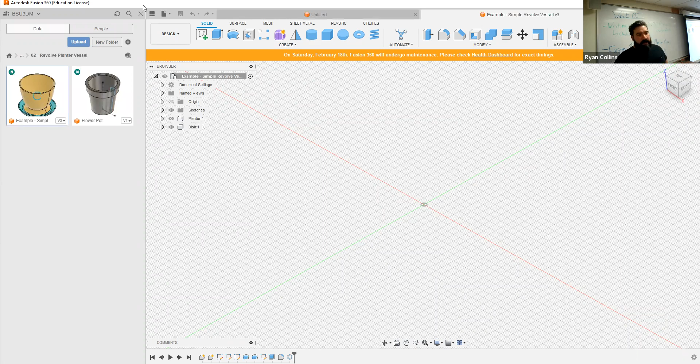Right now it's in the default appearance mode. Default appearance is this shiny metal, steel, that's what it generally looks like. If you're on Windows, press and hold Shift and press N.

It switches colors. If you're on Mac, I think it's Command N. What this is showing you, if you look on your browser tree, I've already created two components, one for the planter, one for the dish, and those are just automatically assigning different colors so you can visually tell them apart. That's all. It has no bearing on the actual finished model, on exporting it into a 3D printer, or on the filament choice.

This is merely a visual representation. As I orbit around this, you can see—let me hide the dish—that in this case it is a cup, basically with a foot, and I've used the circular pattern tool to create holes in the bottom. I chose 5 because odd numbers are always satisfying to me for whatever reason.

Stepping back on the history slider here, let me snap back. First, I started with creating sketches.

I started with creating the components themselves. Up above the assemble dropdown is the new component dropdown. Mouse over that, and it will show you it creates a new component. Remember that the default at the browser tree here is a single cube, but once you start adding more components—which is still a single cube—if there are multiple components within that component, in this case the main browser tree, the icon changes to this little stack of components, which is the icon up here over the symbol.

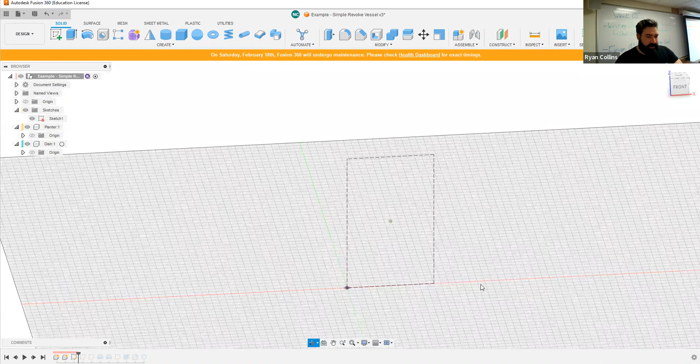So like I said, I was working on the XZ axis—X red, left right, Z blue, straight up and down. What I did for this, I'll open up the sketch. I just established half of my sketch, and I'll show you why I did this. I made this 100 millimeters tall and 60 millimeters wide because the overall is 100 by 120. I only need half of a sketch.

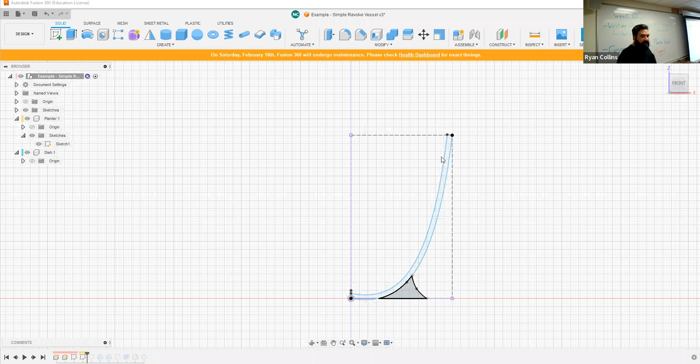Finish sketch, go to the next. From there, since that one sketch is outside of my components, I started the next one within the first component, the planter. Open up, unhide, and I made half of a profile. This is just a sketch—you can see closed sketch because it's highlighted blue. It gets a little bit filled out, but that's okay. They're very basic; we can add more to this in a minute, which we will. I took that closed sketch and finished it up.

In this case, because I was just streamlining this, I went ahead and made my half a sketch for what will be my dish. But I made these within these separate components, or rather within their respective components.

To do that, you have to make sure by default, the full project is active. When I mouse over the very top, on the right hand of this bar, this little dot with the circle, the dot inside, that shows active. That right now means the entire project is active.

If I want to work just within one component or the other, as I mouse over the component icon, that little circle appears. I click there. Now only that is active. However, the other component is visible because it's still visible. Remember, Fusion will act on anything that is visible. If I don't want it to act on at all, hide it.

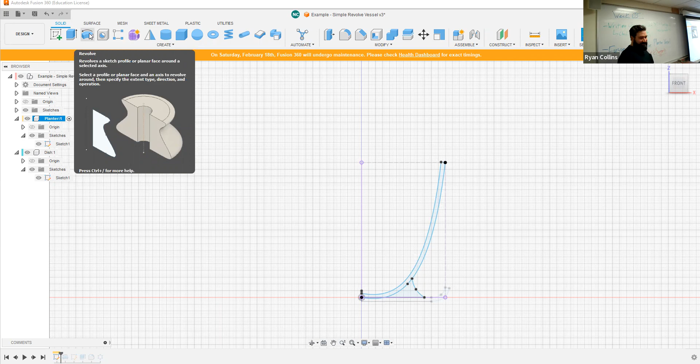But from there, I took that sketch using the Revolve tool, mousing over. It takes a sketch and revolves it around an axis. That doesn't mean it has to be on that axis, but revolves around it. Take that, bam, instant form.

It took that half a sketch, rotated around 360. You don't have to revolve at 360. You can play with this.

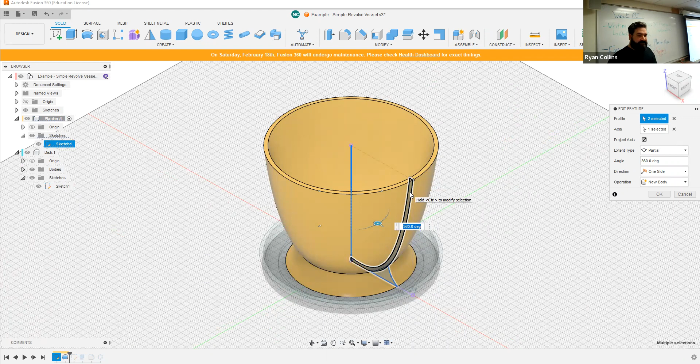I bring up the toolbox here. You have your profile, which I selected, and I made this in two sections, just the cup itself, and then I added a foot. Those are the same sketch. You select an axis. In this case, it's the actual origin Z-axis. And then you can play around with this stuff.

You want it to be partial, maybe do 180, half a cup. You can have half a cup of tea, you Mad Hatter. Sorry, I can't. It's always stuck in my head. You were right not to laugh at that. You should not laugh. That wasn't even a good reference.

But you can play around with these settings. Your standard is full. It's going to go 360. If you want less, you can switch it to partial. Or if you're creating against something, you could create it to objects. You always also have your actual slider. You could do this by hand.

So you can just make partials. But in this case, we're going to do a complete. So go to full. New body, that's all fine. Okay, there we go. Next thing I did is, because I already had the sketch for the dish, I did the same thing for the dish.

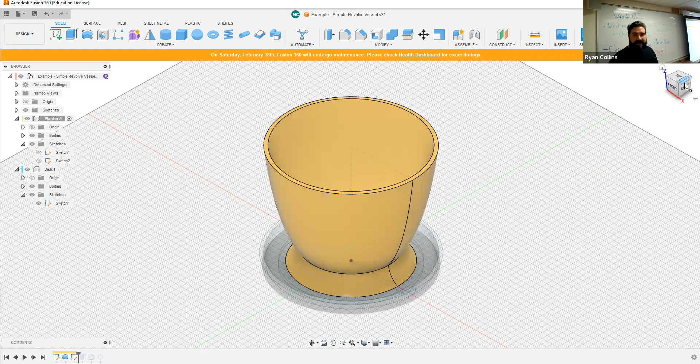Actually, in this case, the next thing I did wasn't make the dish, but make the holes. What I did is I made a new sketch. If I zoom down here, made a new sketch. Actually, I did this on the bottom.

Now, you can take two paths here. You can make your sketch, use the circular pattern tool, which is under create, pattern, circular pattern. You can either make your sketch, finish the sketch, make multiples of that and then extrude through, or like I did, make the one sketch, use the extrude tool to cut through.

Then I added some fillets. Remember, it's fillet, not filet. Filet is a fish. Fillet is an architectural term.

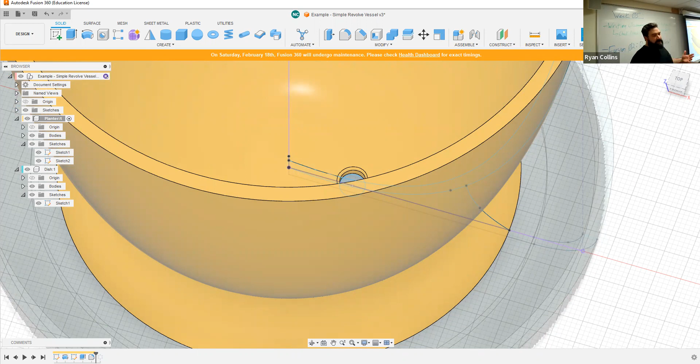Made roundovers. Then I used the pattern tool to create multiples of the completed feature, so I didn't have to go back and do it for each one or anything like that. Now, you don't have to make each one for each one. You can select all of them and then add the fillet tool, stuff like that. So it's not like you need a multitude of fillet tools, but there we go.

That's pretty much it. From there, then I went ahead and did the same for the overall sketch. Now, right now, it's not showing any other stuff. I know I did the dish. It's literally right there because I only have the planter currently active, so it is only showing actions for that component.

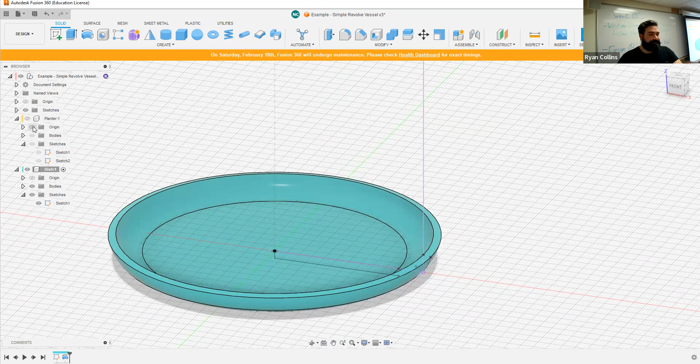If I either activate the whole project, now all of my tools come back and all that such. Or I could just go just to the dish and you can see it isolate just the parts for that. Let me hide the planter. For the dish, it's simply taking that, making that sketch profile and using the Revolve tool to make it a 360 object. So that's essentially the project.

Obviously, we're going to go into some more details on how to make more features for this, because if nothing else, put this in a tray, and right now, yeah, it has drainage holes.

That can't go anywhere, it's just going to bubble underneath there. So I'm going to show you how to make paths through there so the water would actually drain out and away from the dish instead of just getting trapped on it.

So those are the only requirements. You can see why I made that bounding box there. It gives me personally a frame of reference. You don't have to make that, I just like doing that. That's how I prefer to work.

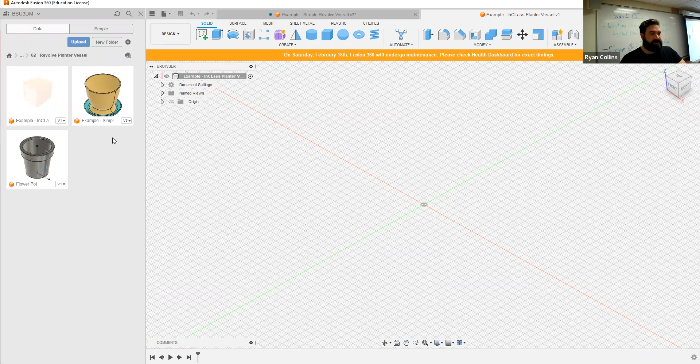Okay, so like I said, first things first, I like to start with either adding my components or with the bounding box sketch. So since one of the main things for the project is multiple components, let's do that.

There's nothing wrong with creating everything just as you normally would, but just to get in the habit of starting with stuff like this, I'm going to start with making my components. I go over to the assemble tool, drop down - first thing is new component, or one of the default tools up top. Hit there, and I'll go ahead and label them at the start.

Planter... geez, dumb fingers. Start there. All right.

So let's delete that, I don't need that new component. I can right click on there, delete. There we are. So now I have reactivated the whole project - little mouse over the top bar, select the feature. Now the whole project is active.

Start new component. If you look at the bottom of the toolbox, there's a checkbox: deselect activate, and it won't activate that component immediately. That's all you need to do. So with that, geez, we'll just say tray.

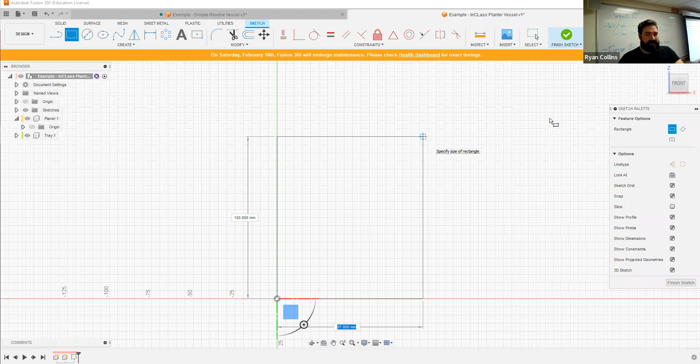I will go to my dimension bar, select there, draw up. All right, that one's only 60. Hit there. Same on this side - oh, that was actually 100. Cool, there we go, so right there.

But as was said before, you want this to be a construction line. So hit escape, double click a side - if you select just once or in the middle, it'll turn that all, but I want just the edge here. Double click on one of the edges - you can either hit X or go over to the construction toolbox here and press construction. Turns into the dotted line.

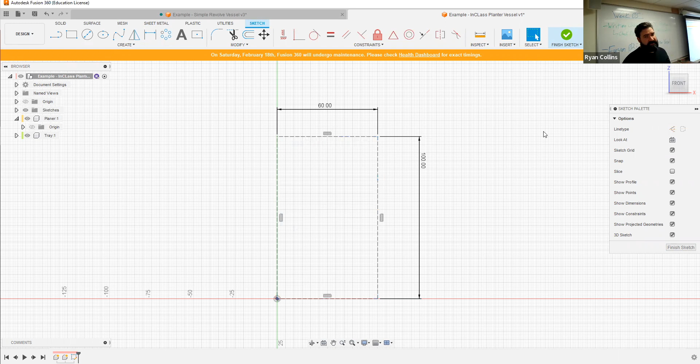Okay, that's it, that's all I need for this first sketch. Now hit finish sketch. This sketch exists outside of my 2 main components - it's on the main browser tree here.

It is outside of either of these. Now I want to start making my vessel and my tray.

To do that, I'm going to activate each component respectively. So I'm going to make the planter. I'm going to go activate the planter component.

Now you see that my sketch kind of ghosted out here. It's still present, it's still visible, but it's not on the currently active plane or the active project. So in this case, new sketch, same XZ plane. It'll flip to the front.

Great. Now, at this part, frankly, you can make this however you please. If you want this to be round, if you want this to be organic, if you want this to be angular, does not matter. You can use this.

You can use a sketch line, continuous, play around with that. Fit point spline. You could start with an object, trim and chop it up, however you like. In this case, I'm going to start with a fit point spline, and we'll modify from there.

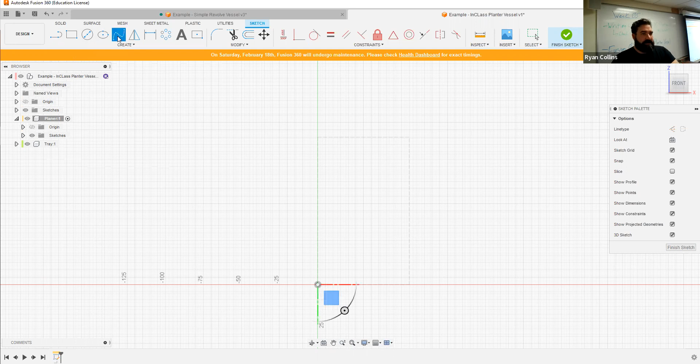So I'm going to start with that, and I'm just going to start at the origin point because it makes sense. Now you can immediately start going up, down, and around. Remember that between 2 points, even if it's a curved line, it's a straight line. It's not until the next, to the 3rd point, that it starts to curve. So, something like that, ish.

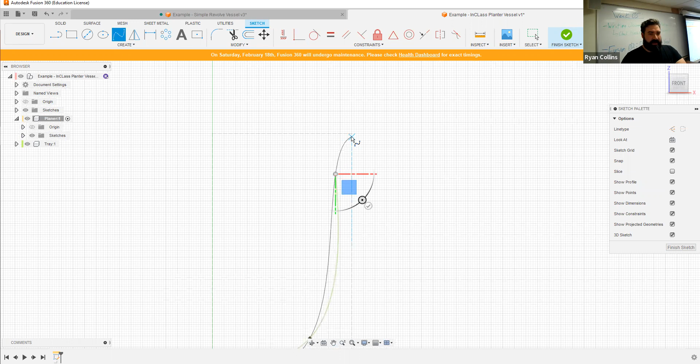All right, let's draw up. Now it's going to start curving on me. I can draw outward from here. There we are. Hit enter.

Remember, you have your control points and you have your handlebars. You can play around with those as you please. Drag that around, click there, mess with my handlebars. Make something really funky, which is going to be horrible for a plant, so maybe not. Control Z that. Something like that, ish.

Sure. Now, I can draw a second line for that, but I don't want to deal with that. That's the whole point of working with CAD.

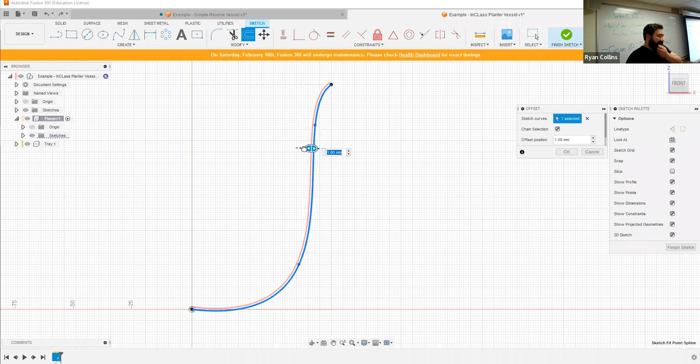I'm going to use the offset tool. Go over to modify, offset, select that line, and this is where you could either go positive or negative, inside or outside. The offset makes a dimensional curve based off of the original. So in this case, I want it 3 millimeters. Like I was saying, 3 to 5, that's plenty. Less gets a little floppy, more is just overkill. All right, there we go.

Easy peasy. Now, this is still an open sketch.

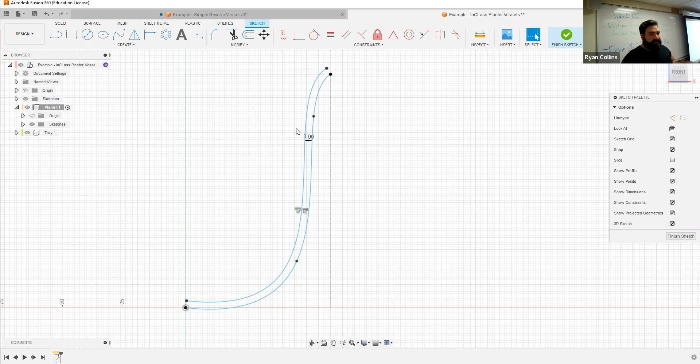So I have some different options. Down at the bottom here, I just want to use a straight line. And with this, don't connect the two. I want to go straight up, 90 degrees, definitely straight up. Doesn't matter if I go too far. Because of how this is going to work—oops, I didn't want that one, delete that.

How this is going to work is we're going to revolve around that center axis. And my sketch rests on that center axis, the Z axis. If I taper away from it or something, you're going to end up with some weird points and such.

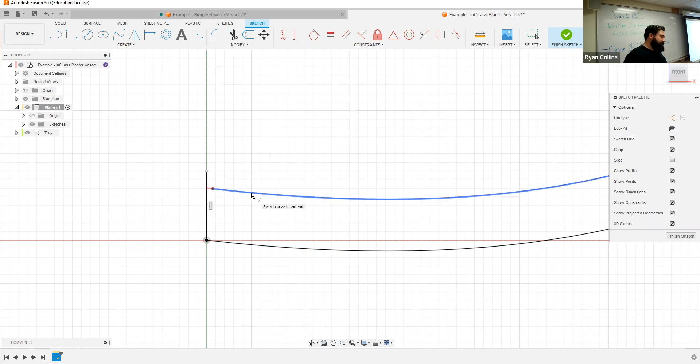So instead of drawing the line between the two endpoints, I'm going to use the extend tool. So just mouse over that. It assumes it wants to extend to the next available line. Boop, there we go, much better. And I can trim off that excess if I need—don't necessarily need to, but in this case, we will.

All right, hit F6 to resize. Now I want to do something about the top. Now I have some options. I can just draw a straight line from here. All right, that closes the sketch.

It's now solid blue, or now it's blue inside. We're all set. Now I can modify this.

I could either say I want to add some fillets here. Now I will warn you, I have found some issues with adding fillets right now. If you want these to be even, before you hit enter, select the next set and it'll continue—they're both going to be the same. Now I can modify this, and this is where it gets weird.

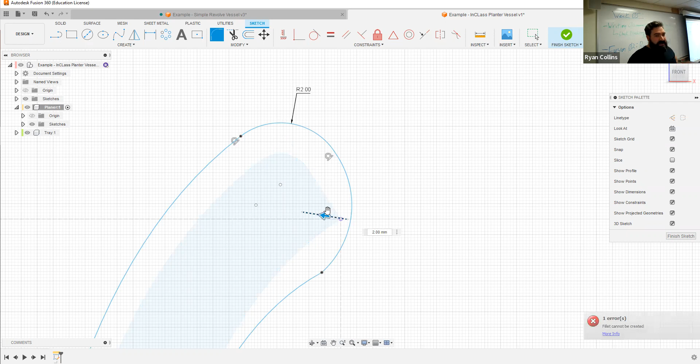So I've run into issues doing this, and I've found that it does the same thing whether I'm entering numerically or by the slider. Right now, I would say if you want to curve this edge, go with a different option.

Either let me Control Z out of that, don't use the fillet now, but use the fillet once it's a revolved body. Or instead of this line, let me just switch that to a construction line for now. The other option would be if I want that to be like an even circle, I would go with using a 2-point circle.

So open up the circle, drop down, go over to 2-point, and draw from here to here. And that's just still construction - I should have turned that off. Now I have a rounded edge.

So I could either make a circle here and now have a rounded edge to revolve around, or when I revolve the object with a sharp angle, a just flat edge, then I can add a fillet to the actual complete edge of the body rather than the sketch. Doesn't matter, it's up to you.

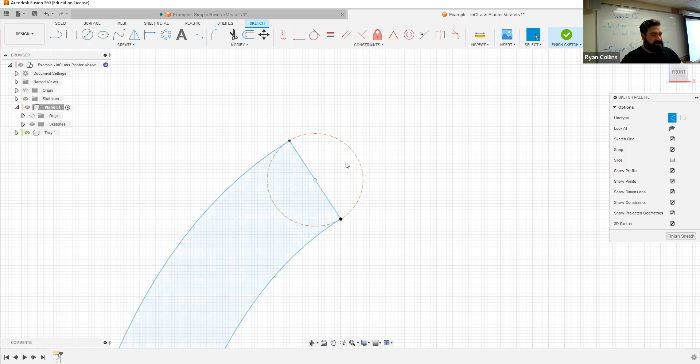In this case, I'm going to go ahead and swap this around. I'll leave this as a construction line for now, but I'm going to use this as a flat edge, and then I'll show you how to apply the fillet afterwards. Resize, okay, there we go. Finished sketch, done. All right, that's a body.

There's my sketch. Let's save. Planter profile or Priffle. Great.

So the basics of this project is now the Revolve tool. That's the next one over from the default, next one over from Extrude. Mouse over, as it says, makes a sketch profile, a planar face, or revolves it around a selected axis.

You can do some weird stuff with this, but we're just going to do a basic one first. So activate that. Profile was already selected, but let's clear all that out. Select profile, close profile. There we go.

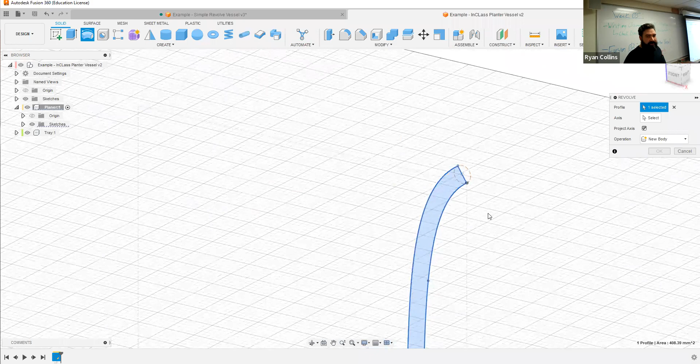If you chose to add a circle there, make sure you've selected the circle as well. If you didn't make any trims, you want to make sure you got both of that. Now, axis, select the Z axis. Bam, automatically creates that form. All right, I'm going to leave it as new body, 360 degrees, extent, all that fun.

Now I've created a vessel form that would easily topple over and has no holes. So I've made an instantly scalding teacup. Great, we'll make teacups and such later. But right now I would like a foot on this so it in fact does not fall over.

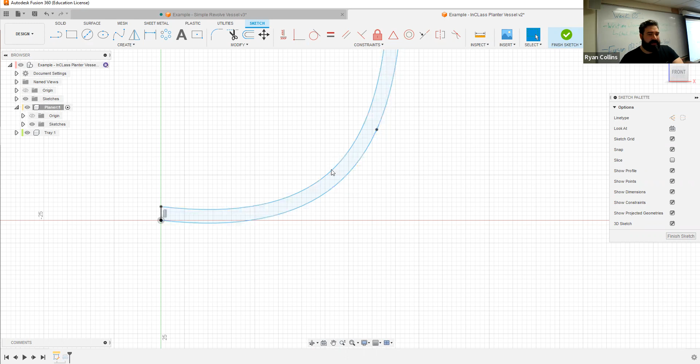So I can either start a new sketch or go back, edit the first sketch. All right, edit sketch, and I'm just going to add to this. You can tweak this all you want, keep going back and forth, that's fine. All I'm going to do here is add a little bit of a foot. Now the example one I made a solid foot - that's kind of chunky. Let's make something more elegant.

So in this case I'm going to use another fit point spline. Just start somewhere and make kind of a little bit of a roundy foot. Super duper, same deal, that looks fine.

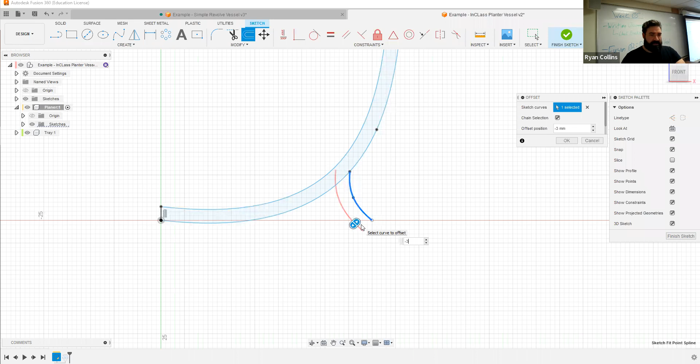I'll use the offset tool again, going the opposite direction. So we'll say -3 goes down to there. Obviously it gets way bigger. That's fine, and I still need to close this.

All right, straight line, right across, that closes it. Let's trim some chunks off, use the trim tool. I don't need to trim this away - that's really unnecessary, but I will have to add a selection to the profile when I finish.

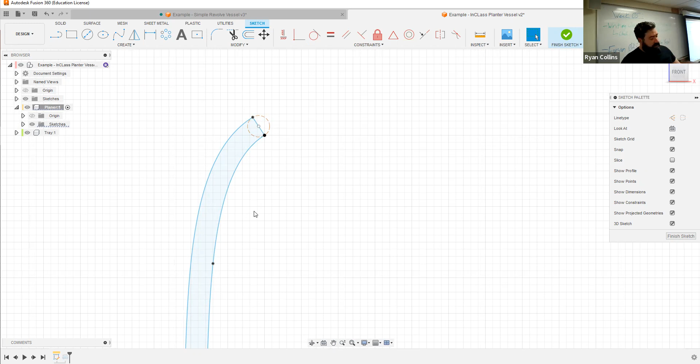Now right now I have a few options. I can add a fillet in here because this would technically create a very problematic point, but I can also add these features afterwards - it really depends on if this runs into any problems. Like you saw when I was adding fillets to the top here, it really distorted everything because my two edges were based off of an offset, and those built-in constraints can conflict with one another. So in this case, I'm going to add my fillets, my curves afterwards.

Okay, finish sketch. It didn't add anything yet because now I need to go back, modify the revolve, edit feature, and just on profile, also select that. Boop, there we go.

Now, kind of a chunky base. That's fine, let's add some features to it. I want to add the features first because I don't want my holes that I'm going to cut into it to interfere.

So first I'm going to make some rounds, let's add some fillets to make this pretty. We haven't officially talked about the fillet tool on a body yet. The fillet tool is for rounding over corners. But when working on a full body, it has two different settings, actually several, but we're going to stick with the main fillet or full round fillet.

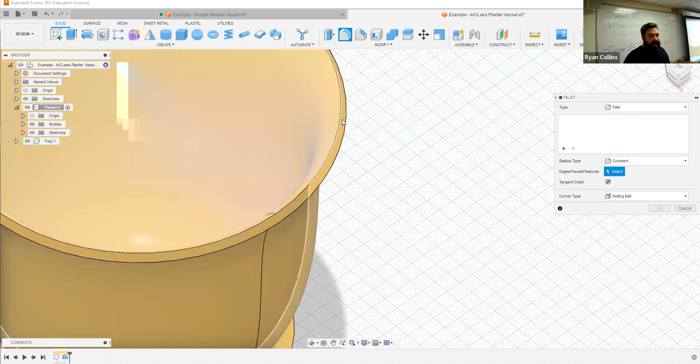With a regular fillet, I can select just the edge, and let's say that's only 1 millimeter thick, or 3. So I round that over. I can just select that inner edge, or add another edge, or let me deselect and select both of those edges at once. Now when I push 1, it rounds both of those corners off.

Because it's a full face, I can select the full face, press 1, and it's going to do the exact same thing because it's on either edge of that face, since that's a shared face. But what if I want that to actually be completely round?

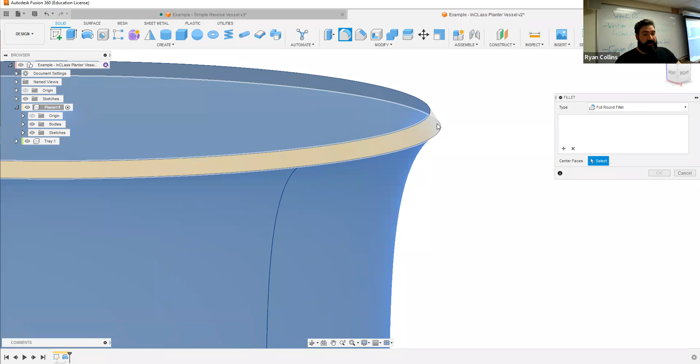Let me clear that selection, go up to type, drop down to full fillet, full round fillet, see if this works. Doesn't always work on curved edges. In this case, okay, it's going to select some weird stuff. Okay, it actually worked, great. Now there's no flat spot between. It assumed the correct radius for the fillet and created this lip completely round.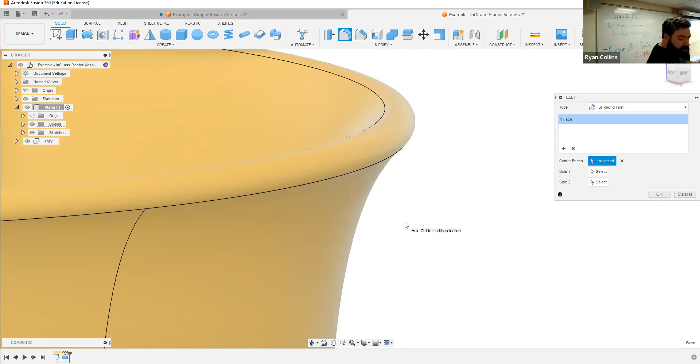But on full round, it does exactly what it says. Adds a bit more radius to that fillet and creates one solid curvature. So that works really nicely. But I want to also make sure that didn't do that anywhere else. Orbit around? Nope, good, okay cool.

You can continue to add fillets here by using the plus tool, the add selection, or you can finish and start another fillet. Sometimes, depending on what you're doing, adding fillets within the same tool is better. Sometimes when you have more different types of fillets, it's best to create multiple fillet tools.

So in this case I'm going to deselect full round, I just want the regular fillet. One of the things I want to do now is adjust the curvature of these transition points, mainly the outside here, select there. I'm just going to drag it out until I like it. Ooh, way too much. So you can actually just keep going and you'll end up with something like straight. So why bother with the curve?

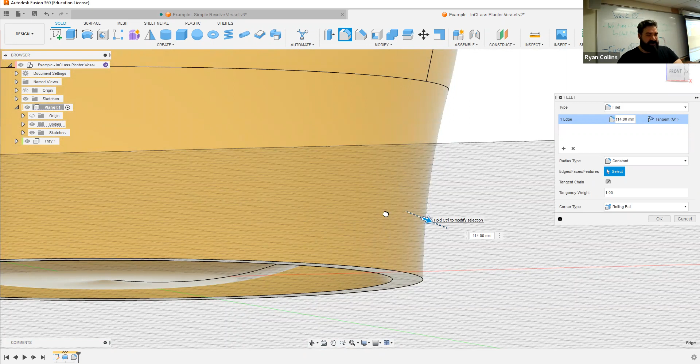You can really go nuts with this. We'll do something slightly lesser, 6 seems decent enough. Now I'll add, well, you know what, no, I'll go ahead and just do the 1. Come on, where'd it go? Just the 1, no stop that, just the edge, dang nabbit. Oh, because it keeps defaulting over to full round, I didn't see it do that. There we go, and what was it, 6? Yeah nice, okay.

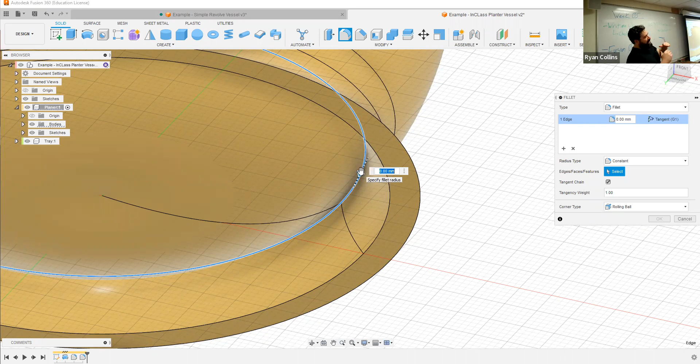Remember, if I right click, I can bring up the recently used tool, just go straight up, repeat fillet. Now this time what I'm trying to do is round this out, because sharp corners, especially deep sharp corners, create a pinch point. Remember, we're creating this 3D printed layer by layer, so if multiple layers converge on one sharp point, it creates a weak point because there's fewer layers for it to glue to, there's less surface, and smoother transitions are structurally stronger.

So I'm just going to create a fillet here, just drag this out a little bit. Doesn't need to be huge, but something enough to at least smooth it out a little bit. That's significantly better, okay cool. You can round this out as well if you really want, no problem there.

Sure, we'll go one more full round fillet, see if it selects it. There we go, nice and roundy bottom. Now, one thing about using a full round on the bottom, remember that this is going to be printing flat on the print bed.

They don't do as well with round things with a very minimum contact point. So in this case, I actually would want to not use the full round and instead use 2 edge fillets, say like 1, so I actually do in fact have that flat spot. That will make for a stronger contact point. And in fact, might actually shrink the fillet a little bit to half, so I'm going to say 0.5 millimeters. So it's a little bit flatter, a little bit wider. It just makes for a better contact point for making contact with the print bed. So just thinking ahead a little bit.

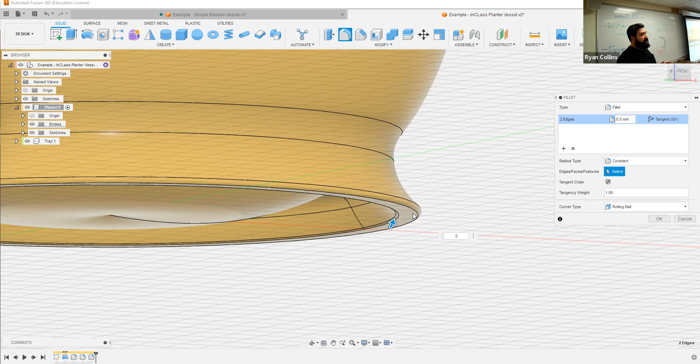Okay, now snazzy, I added some features. Those are just structural points to make it a little bit better, a little bit stronger, a little bit smoother, a little bit nicer of a print. That's all. Okay, so I'll save. Fillets added - I just realized I spelled that fillets. So we'll see how that translates to when I go print that. That might just be foreshadowing.

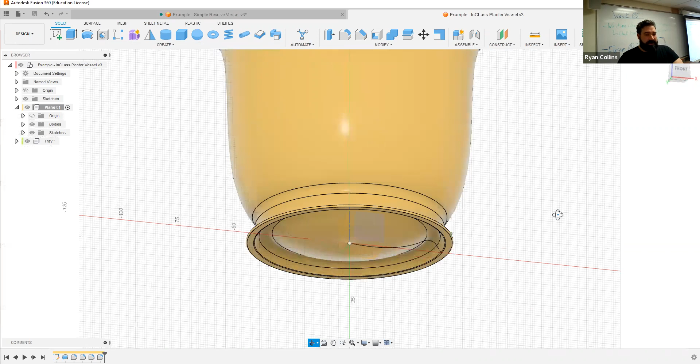Awesome. All right, next thing is you need to have drainage holes in this, otherwise it's just a cup that will definitely kill a plant. So with this, I'm going to create a new sketch. But instead of working on the XY or the XZ plane, I'm going to work from below, but still on the XZ plane - tabletop, just looking at it from underneath. So I'm going to select a plane. That works there. So now it automatically moves the object like I'm looking straight up at it.

Cool, in this case I'm just going to make a circle, nothing fancy. If you want to make something fancy, more power to you. I'm going to use a center point circle, and I'm going to put this on the major axis. It makes it so much easier if you start something that you're planning to use like the circle pattern with, make multiples, start on a major axis. That way you have a reliable starting point.

If you just kind of put it willy-nilly, in this case it's not really a problem. In the future, more complex models, it might become - I won't say problematic, it's more that it just can create unexpected and unnecessary issues. Whereas if you're going to make multiples of it anyway, put one on a major axis and it just simplifies things. So the reason I added those fillets and such first, so I would need to put a hole here, but I want to make sure this hole is not too large or going to interfere with those fillets, those curvatures. So that's why I'm making this after the fact.

And I can see where it's going to be. All right, 8 might be a little overkill. 5 millimeters usually seems like a good size, but I don't know, 5 to 10, somewhere in there. 10's probably a little bit large unless you're using like really coarse soil. So I don't know, 5 seemed reasonable, maybe 6. I mean, that's really, we're literally talking about 1 millimeter difference, so it wouldn't really matter.

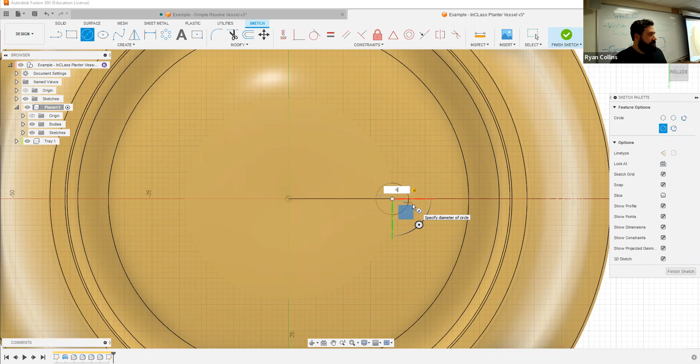Okay, so you have a couple of options here. Great, I made a circle. Hooray. Now I can use a circle pattern here, which on mine is default. Go to create circle pattern. This is in the sketch space though. I don't want to make more unnecessary tool actions than I have to. So I'm just going to make the one circle. Select, create, or finish sketch.

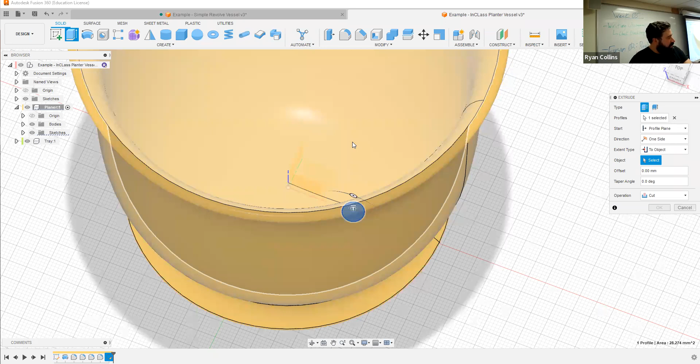Great, now I'm going to use the extrude tool. I'm going to select that profile and I'm going to drag it upwards. I can drag it upwards, and because it's going through a body, it automatically changes operation to cut. But like I said, what if I want to change things? This is me personally, I don't like to use just arbitrary drags, arbitrary, unnecessarily large amounts. So instead of by distance, I'm going to change the extent type to object, and I'm just going to select the inside edge, the inside face of my form.

Now it's going to cut only right to there, meaning that also if I decide to go back and, you know what, I need to make this bowl thicker - I didn't think I was going to need it this thick or as thick - make it thicker. Now it will always recalculate to the thickness of the form, of the bowl. Easy peasy, all right, great. Why did it not cut through? What the deuce?

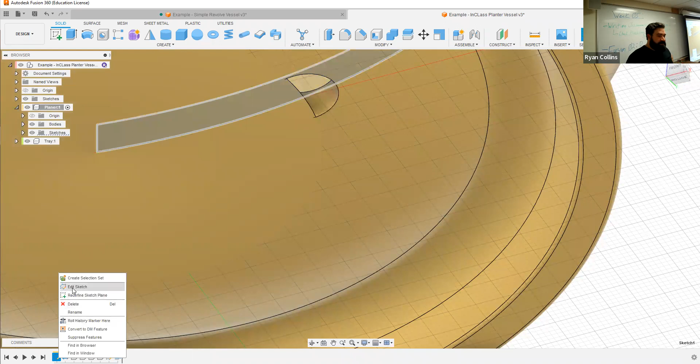Oh, all right, so here we go. Here's an issue I didn't expect. My original sketch dipped below the actual profile plane, so let me go back and edit the first original sketch. As I look back here, see how this dips below the x-axis? My circle is right here between those two. My circle started on the x-axis, so it did not affect this spot.

So I've got two options. I can go back to that extrusion and make it go two directions and also cut downward, or it's going to be a lot better if I just fix this right here.

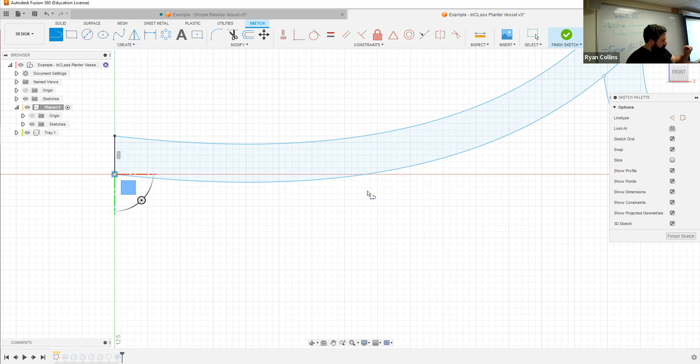Easiest way to fix this: draw a straight line across the axis, starting right at the point there, straight across to where the x-axis meets my point. When I get close, my cursor switches to an X and it'll kind of snap and stick there a little bit. Great, that's all I need.

I might have to fix my revolve, but now when I mouse over that, you see how it only highlights part of that? Much better. Honestly this kind of divot here in the center could be better without, but it's not really causing a problem, so finish sketch.

Now that's still part of it, so I need to go adjust that revolve. Right click, edit feature, and just deselect that little chunk there. Now it's flat at the bottom. Recalculates — okay, cool, that actually works pretty nicely and kind of works in a double effect.

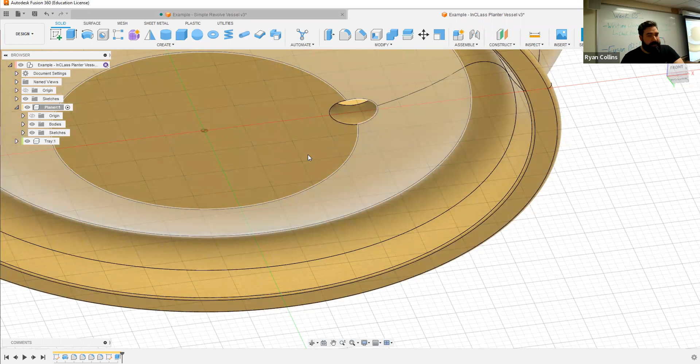One, I'm going to get a better bond to the print bed when I go to print this, so a flat bottom works really well. Also, my hole here isn't on this flat spot, it's kind of in between. That's actually pretty helpful, because now any water draining out wouldn't get stuck underneath this.

Cool, all right, so now I'm going to add a couple of features to this. I'm going to add a fillet. Instead of going edge by edge, I'm just going to select the inside surface, and let's say, I don't know, 0.5.

Now it's going to apply a fillet to the edges down here as well as inside. Great, now I've completed that one hole. Since that's complete with all the features, let me go to create pattern, circular pattern, and now I'm going to make multiples of that completed feature.

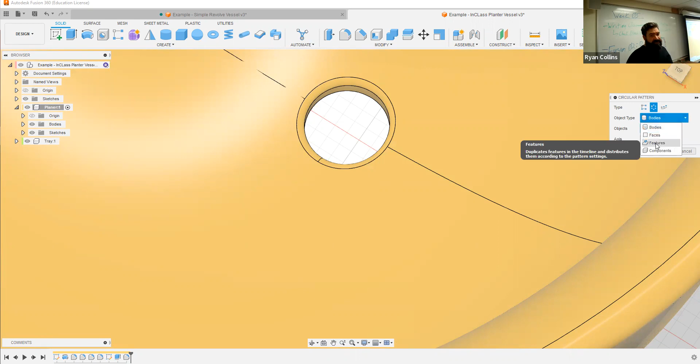So go to object type — not bodies, actually features. Hopefully this works, sometimes it doesn't work on the inside. I'm going to use a selection box, dragging from the left over. It should select everything, but it didn't. So, pooper, sometimes it just doesn't.

So now I just have to go through and select each of those, make sure you've got all the features. All right, they're all blue highlighted. Great, now select axis — it's hard to see sometimes. If you have trouble seeing through an object, you can temporarily hide that body so I can see the z-axis. There we go, now you see it's automatically making multiples of that feature. Unhide it, now you can see it all again. Toggling hide on the bodies is sometimes easier.

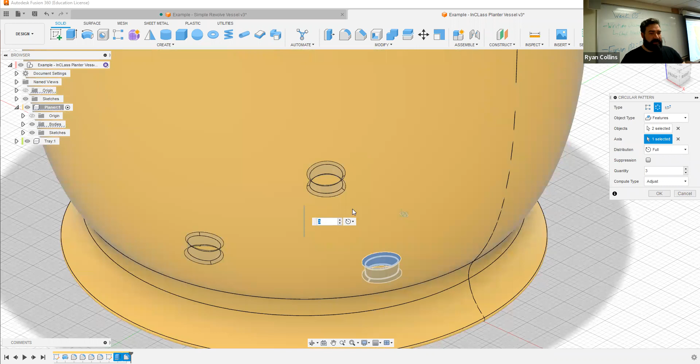All right, three, like I said more — five, seven, not fifty-seven, that's a bit excessive, we'll go with this. There we go. When I finish, now it completely recalculates, does all of those same actions to each of those holes, makes a complete thing so I don't have to go back and forth with each one.

That's the way I prefer to work. You could extrude, you could make multiple circles on your sketch, extrude all of those sketches, and go through and add all the features. I like working this way — let the thing do the work for me.

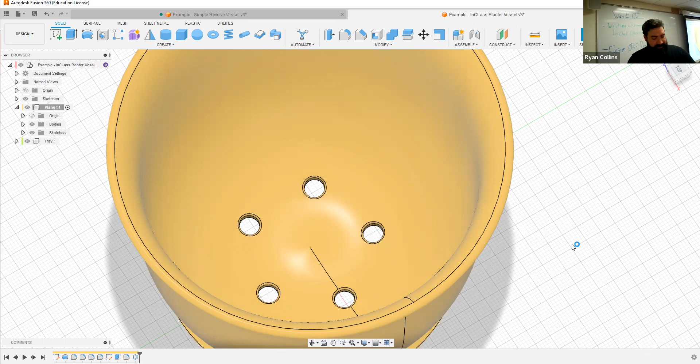Okay, that's pretty much that. Now, one other thing I like to add when doing something like this — because water would still get trapped underneath this foot — I can make one more sketch here, working on the YZ plane, and add a hole right there, I don't know, 10, to make like a little archway.

Cool, finish sketch, extrude that. I want it to go all the way out, but that's going to chop a giant hole through here. So this is where I can play with — instead of starting at the profile plane, I can start offset.

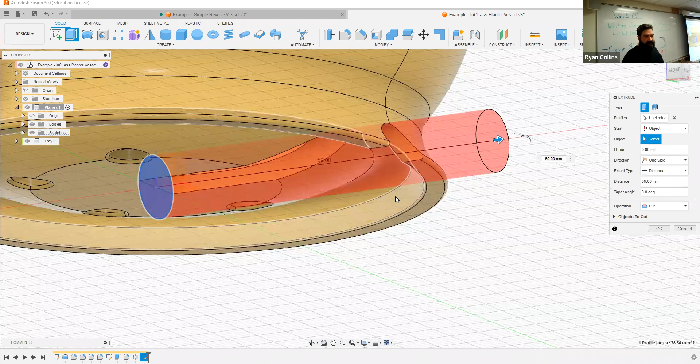Let's see if it starts as an object. Let's try that: starting at object, select there, then extend to object on the outside. Sometimes if you make an extrusion first, drag it out, and then change your mind, it gets confused. So if you're selecting these options and it's not doing what it should, cancel out, start a new one, extrude, select there.

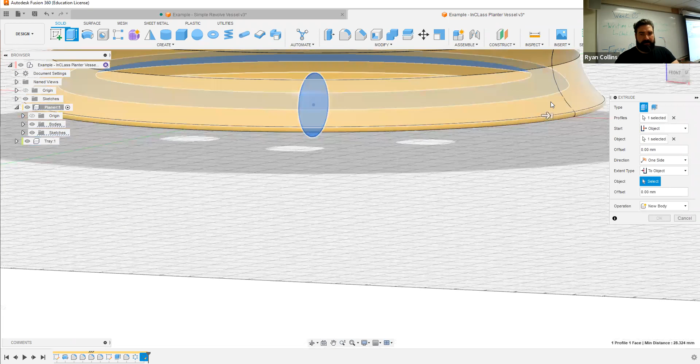Now let's redo it, starting not at the profile plane but further over. Select here, right there, then extend on the outside. Still didn't do it. You're making me look like a schmuck. All right, I don't know why I didn't do that.

So we'll just have to do it manually. Offset just means instead of starting right at the start plane, it's going to start further out. What the heck, sometimes it just acts like a jerk.

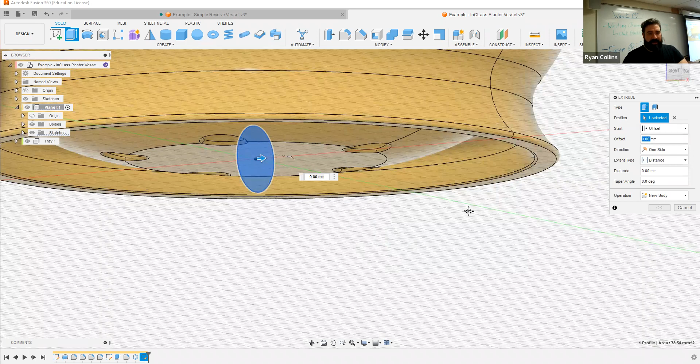I want you to just start somewhere out there. Why is it doing this? You know what, fine, be that way, we'll just start it differently entirely, you schmuck. Sometimes it does this. All right, we'll just start an offset and go way out, somewhere out here.

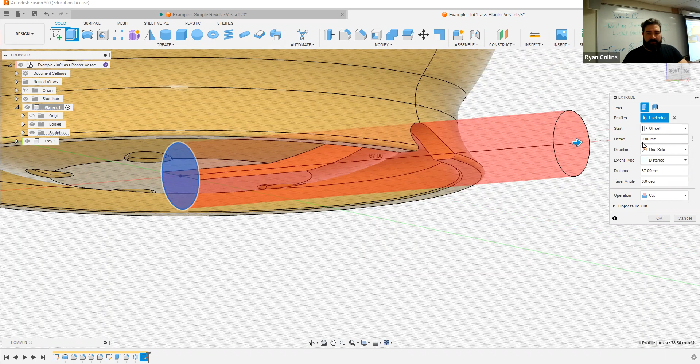Extent type: distance. Where is my... Huh, why is it not doing that? There we go, weird, it wasn't doing it. I don't know why it wasn't working for me.

All right, now let's try the To Object. So now it's starting out here. Let's see... no, cut. Why is it acting like this? Clearly something I am or am not doing. That is very strange, let me try one more time. Yes, I want you to do that.

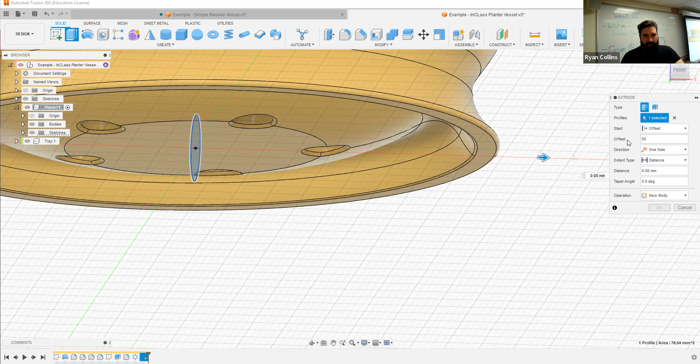But I want you to start with an offset, let's say 50. I don't know why it's doing this to me. I think it's offsetting too far. There we go, yeah, it was just offsetting too far, so that's very strange. I was having to work back and forth, that's irritating.

All right, tell you what, because it was doing a bunch of weird things, let me skip around a little bit and show you a different way of doing this. I was going to get to construction planes later, but I'll just throw this on. You can choose however you want to approach this. The straight-through drainage holes are ample; I'm just trying to show you how to add a little more feature.

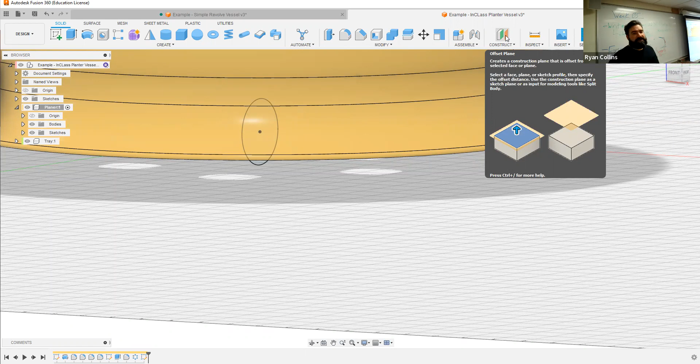Now, because I was having personal problems with this apparently, you can create additional planes to work from in Fusion. Go all the way to the right on the top bar here, and the default is offset construction plane. This is much like a sketch, a construction sketch—it creates a starting working place to build from. There's a slew of different ones, but all I need is the offset.

The reason I'm doing this is because instead of working from the origin and out, I want to work away from it and go toward the origin. So I'm going to select—you always have to select a starting plane to work from—the exact same one I did. If you have trouble getting at it, hide the bodies and work from there. Now I can just drag this out.

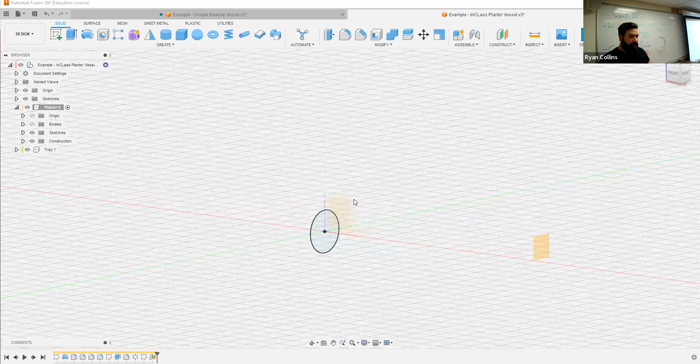I was using like 50 before, that sounds good. Okay, see this little floating square out here? This is simply the exact same thing as your origin plane, your origin set—it's just further out, that's all, just a starting point.

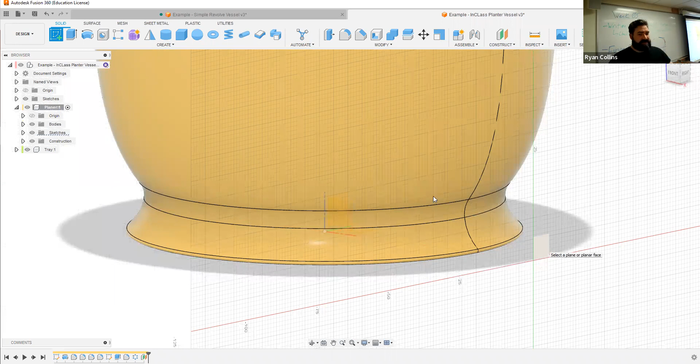All right, let me unhide the body. Same deal, I'm going to delete that sketch I made just to get rid of it, it's causing me headaches. Start a new sketch, and I'm just going to do it on that construction plane. It's still the XZ axis, just away from it, that's all, exact same thing.

Make it a circle, 10 millimeters—that worked. Great, finish sketch. See how now it's floating away from the body, that's all. Same thing, extrude backwards, it changes to red, cutting through. I'm just going to align it so it's in that arch there. Hit OK, there we are. All right, that's all I was trying to do—just so you have a little place where the water can escape.

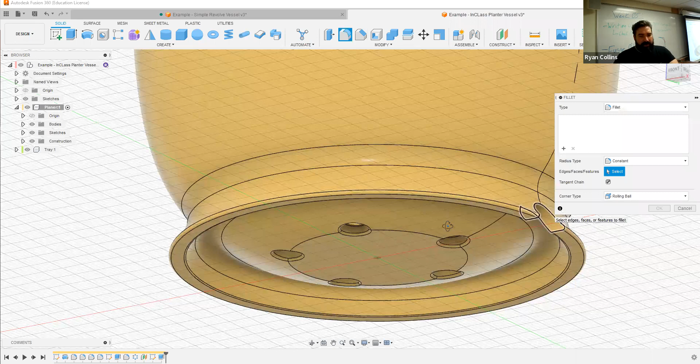I can do the same, add a couple little fillets here. I will warn you, adding full rounds here can be problematic.

It might actually be better to either make some really tiny ones, like 0.1 millimeter, so it's just a tiny bit of round, or not at all. It's up to you, but I just like to round things out. There we go, same thing.

I'm going to add a couple of arches to this pattern, circular pattern features, selecting those features. Sometimes it's hard to select, doesn't want to sometimes. You have to zoom in sometimes.

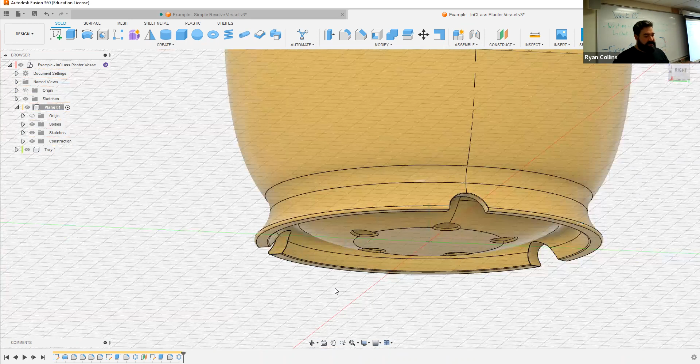Axis, Z-axis. Oh my God, not that many. Let's just say 3. So there we go. Same deal, just made some cutouts on the sides. That's it, so sorry for the additional kind of unnecessary complex way around that. It was causing me problems, so a workaround.

That is it, that is my semi-fancy little vessel. All right, so let's save there. Drainage. Done. All right, next thing is the tray.

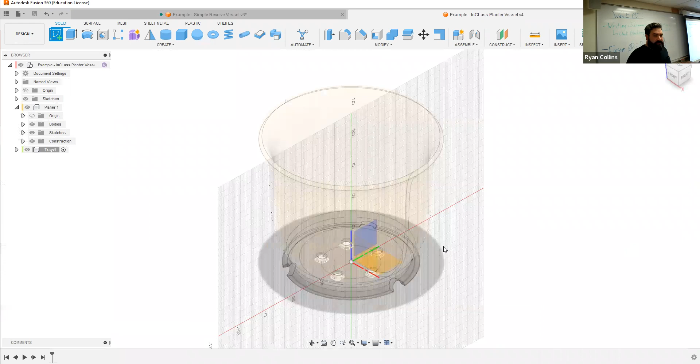So let's go down, activate the tray component. The original ghosts out, so you can still see it there. Great, I want to create a sketch. Same deal, right on the front, XZ axis.

Same, I'm just going to create a tray. I'm going to start with the center, start with the top, and just use a straight line to go outward. And then from there, I don't want that little line. Got a straight line. If this is confusing you, hide the first body or the first component, the planter.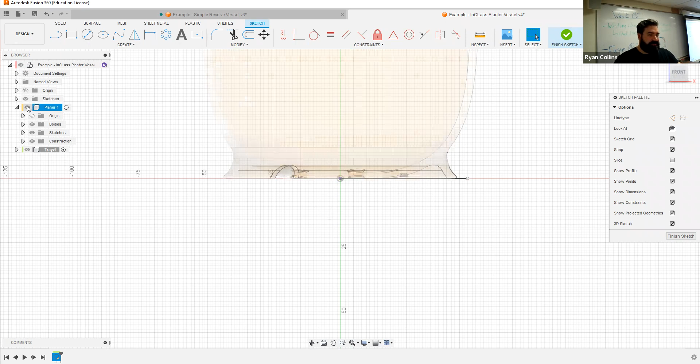Now I know my little line I'm working with. If you need, go back and unhide your original sketch. That'll give you some reference point too of your bounding box there.

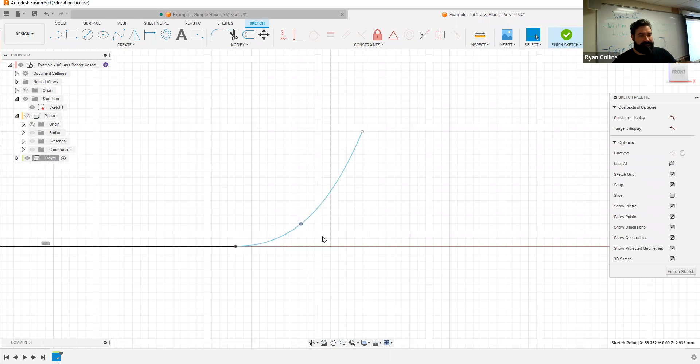And then from there, I'm just going to use a fit point spline to make a little bit of a curved lip. Maybe I want this to be a little bit deeper. Ooh, there we go, yeah, that works. So you want to move this around, adjust this line. That works, great, make it double thick.

Offset. Now I want to make sure that I'm going out and away, because otherwise I'd be interfering with this and it wouldn't, the original object wouldn't work well. So yeah, negative 3, that works nicely. That's out, 3 millimeters, perfectly fine.

Close the sketch. Center here, straight on down. That works. And then for over here, you know what, this time I will use that circle. We'll use 2-point circle, one point starts, the other point ends. Boop, that closes the sketch.

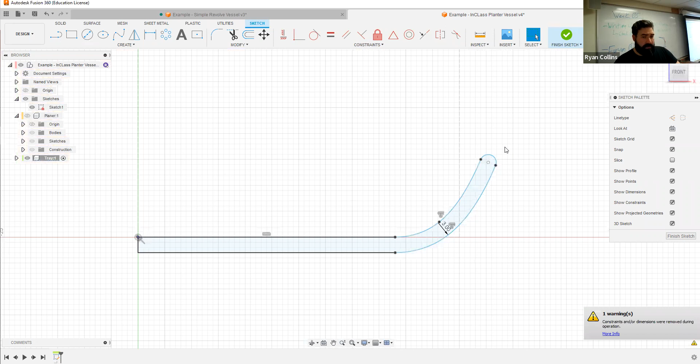And let's trim away that chunk in the center so that doesn't interfere later. There we go, okay, simple, just a half of a profile of a dish. Revolve, select that profile. Now my axis, boop, makes a simple little dish. That's all, looked okay.

Now to bring everything back in proper view, go up to the top, activate the whole project. There we go. If you want, I can now select, if I want to apply appearances to this, I need to switch back to appearance mode. So press Shift, bring up the appearance tool.

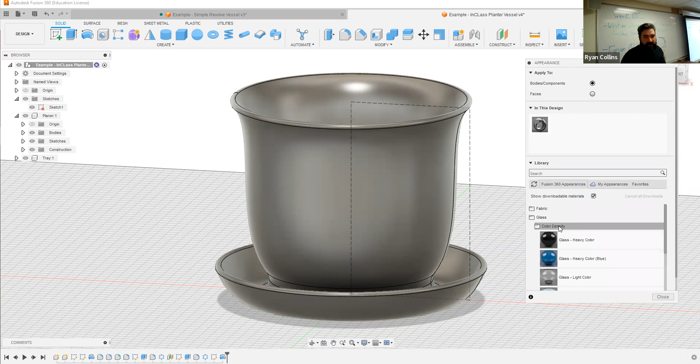If you haven't played with this before, you've got a whole mess of stuff you can drag and drop on. This works by bodies and components. There's only one body on each of these components, so same deal. I don't know, make it glass, sure, smooth, textured, all of that stuff. Color, ooh pretty, blue, drag and drop, bam, blue glass bottle or glass thing.

And just because we can, let's do palladium, sure. Why not a polished palladium base? Because let's get just extra fancy. Okay, there you go, you don't have to do this, this is just something to start playing with.

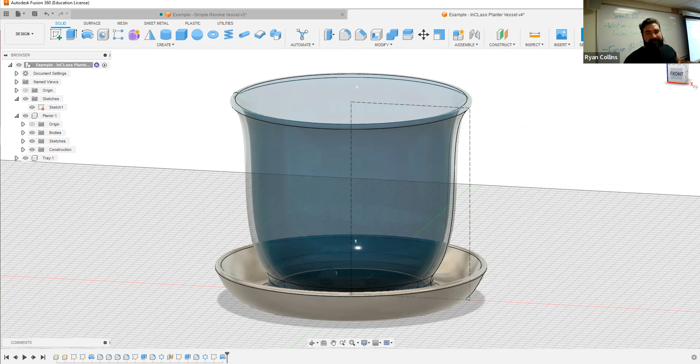But there you go, so that's pretty much the project, isn't it? Two different components, the planter and the dish, so you got a place for water to drip to. Needs to be about 100 millimeters by 120, somewhere in there. You could be 100 by 100, that's perfectly fine. Appearances are optional, but it does need to have drainage holes in it.

And the idea being that if I hid the tray, this would not be a weeble-wobble of a dish. It would actually not wobble over because it has a little foot. You could even have created this as if you wanted standalone feet. Instead of revolving all the way around, you could do a partial revolve, round those out, and then use circle pattern to create little tiny feet like it's a cauldron. That works.

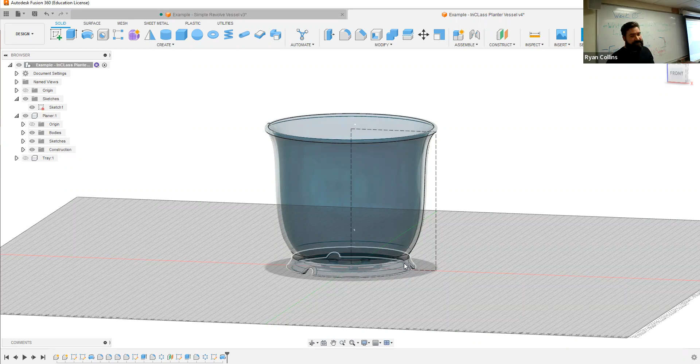You can cut holes in the sides of all of this. In point of fact, let me show you real quick, keep playing with this whole thing. Let me shift back over to auto color. Let's do a doodle, create a sketch on the front here, and this is creating on the XY plane.

Let's use an oval, mousing over on the major axis here. As I mouse up and down, the crosshair switched over to an X, and that little triangle appeared. The triangle is the constraint for midpoint, showing a midpoint between the top and bottom. So, oval or ellipse, drawing somewhere up and then somewhere out. That is floating right in the center on that major axis.

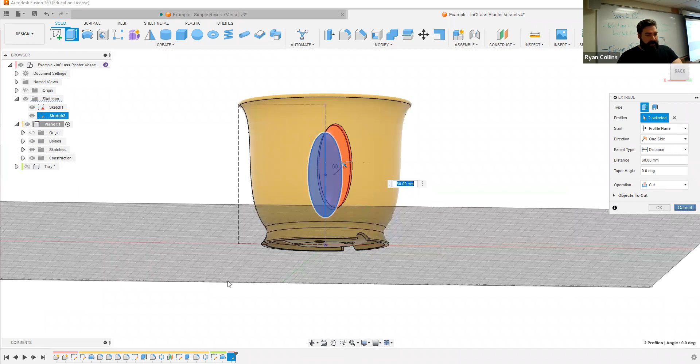This could even be like some kind of doodle. That could even go back, edit sketch, and let's hide the body there. And I don't know, maybe draw a little doodadery on the side here... frog eyes, sure, whatever.

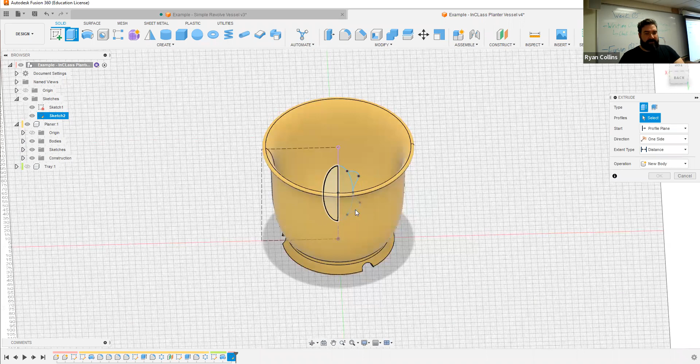Okay, that's gonna be a terrible idea. Whatever, okay, just if you wanted more of a featured thing. Unhide the body, hit extrude, select all of those, drag it straight outward, make a little cutout. Now, of course, that's a giant hole and not a good idea at all, but from there you could continue to use this pattern tool into oblivion.

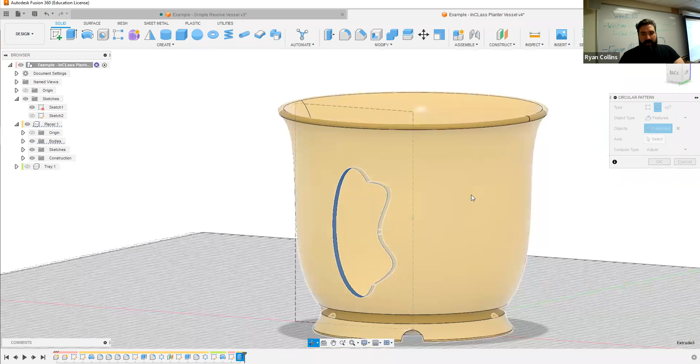Select that feature of the hole. Come on, let me select it. There you go, and I could make multiples around the center axis. That is how you would make a multitude. Let's try more, see if I can make this just a mess.

Make a whole bunch of holes on the sides and basically create a barely there vessel if you want. Totally up to you. There's ways of taking this way further by splitting this up into major chunks, but we're not going to deal with that right now. We're going to focus on finishing this out, make it a compatible project that we can then print.

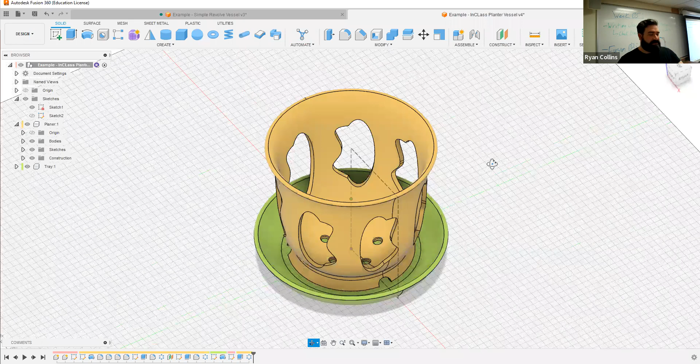Okay, so unhide all of that, and there you have it with all kinds of additional features. Now I've completely negated the functional aspect of this—this wouldn't hold anything, so maybe not. There you go, you can always back up, don't have to print it as is. Save, done.

Okay, so I did want to address one quick thing. In case you did not create your components beforehand, it's very simple to now separate objects into separate components. So I just made two cylinders—these are solid, just representational. I used the cylinder tool as a quick representation.

Very easy to now create those into separate components. You can either simply create new components—now it's trying to create this right now, an empty component, there's nothing there. I can now say like, body, drag and drop that in. I'm mousing over where it says component, and now drop that component in there. I'm on auto color, so that blue is not just because it's selected, that is the default color.

The other way: select the object, make sure that's actually the whole body, now go to new component, standard, all of that, make sure the full project is active. Now because I selected that and created the component with that selection, it automatically pulled that other body into the new component.

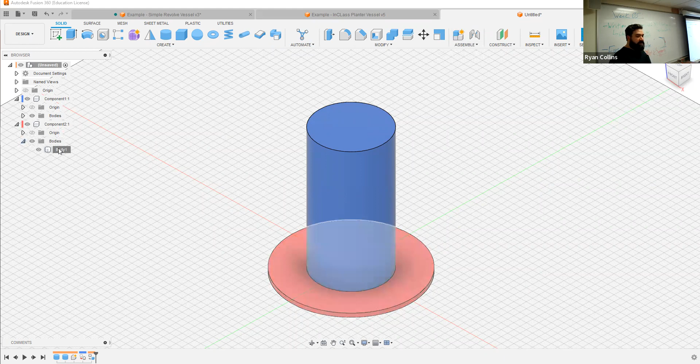So it's very simple, two different ways to do that. You can either literally drag and drop it on once you've created the component on your browser tree, or you can select that object and then create the new component and it'll pull it into the new component. Two different ways, same result. Your project, the assignment does have to have your objects as two separate objects within their own component.

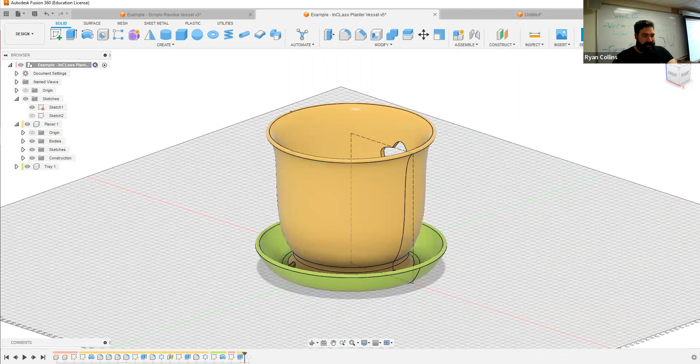All right, okay, so that should finish it out. Two components, got drain holes. I went a little heavy on the drain holes, and obviously I added way too many holes in the sides, but as an example, why not go to an absurd extreme? Go back a little bit, don't need to have those there. But there you go, so that's a little planter vessel with two components, drainage holes in a tray—not tree yet, little tiny tree. All right.